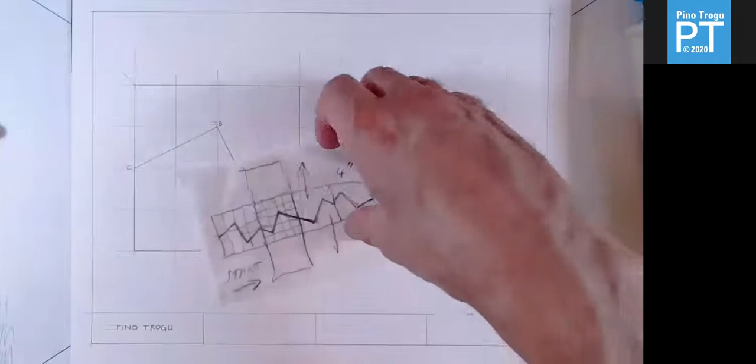Very quickly, here's what we did so far. In part 1, we did this sketch of various possibilities of sectioning the face of a cube. Then we picked one, and once we picked that, we did a couple of operations. We did a mirror image of the design onto the right, and then we took that whole pair and flipped it. You can see you get the same thing, except flipped. That's our pattern.

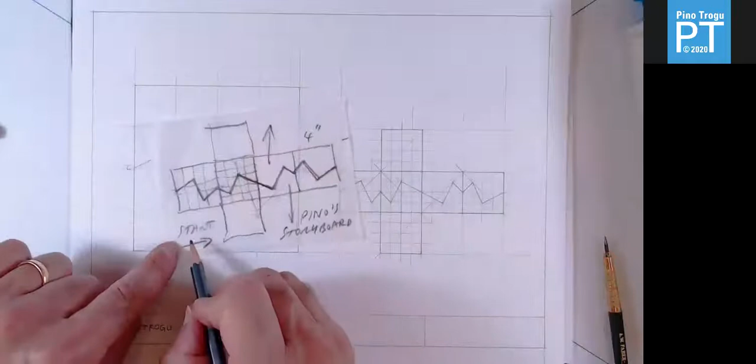So in part 2, and this is very important that you keep this, okay? At some point you might want to mark it and say, this is Pino's storyboard or something, because it's important that you remember which was the original section, even though technically they're all the same, but they're in different orientations. That's very important.

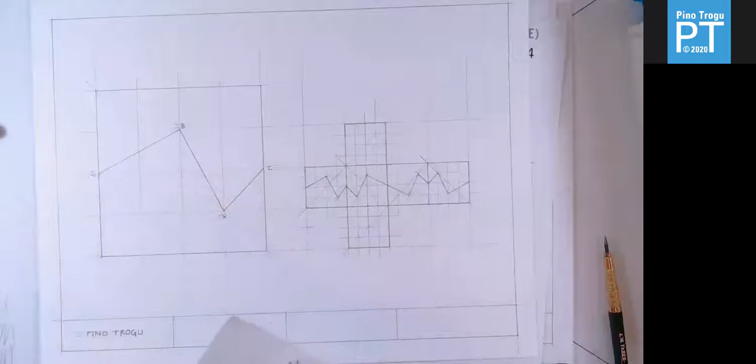So we simply did a drawing for part 2, which is just a straight-on shot of the cube in its full size, 1:1, 4 inches by 4 inches. Drawing light lines first using tools, then darker lines for the actual objects. Just mark the letters that belong to your section, and that's essentially the copy of your sketch on the right, okay? Everything is 1 inch apart going across, I think it's 1.5 inch from the title block, and whatever is left on the top, okay? This was the easy part because I could just repeat this 4 times.

I'll repeat this to make the cube, and then 2 more squares, and I can build the outside of the cube, right? I'm going to cut that. But the tricky part is how to do the inside. So we're going to figure out how to do those triangles, the exact dimensions, okay?

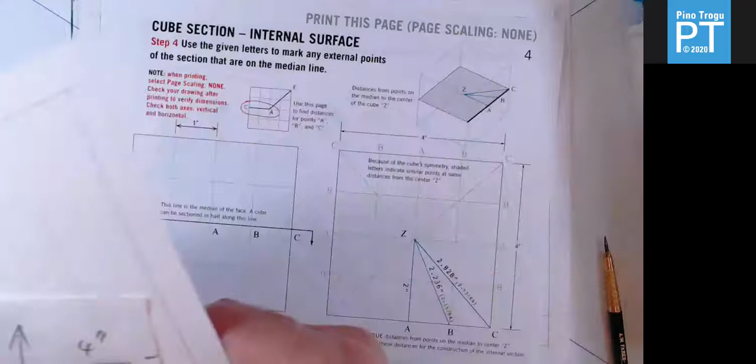Since you're all at home, and since I'm not sure if you have a printer or not, there's several ways that you can do this part. Oh, by the way, this drawing final will look like this.

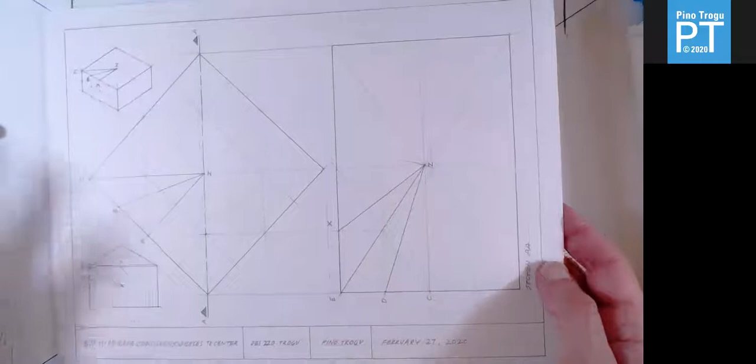So again, this is part 3. This drawing is actually right now extra credit, meaning you don't really need to draw it if you have the other bits of information that you can perhaps print. If you can't print at all anything, you have to make this.

Otherwise, you have no way of knowing how big the pieces are. But if you can print, you could print this, although you'll see in a moment why these are actually a little more complicated.

I think I mentioned it in the introduction - one of my students at some point named Slate, it's named after him, came up with this idea of doing all the possible lines kind of from the get-go. I'll explain in a moment.

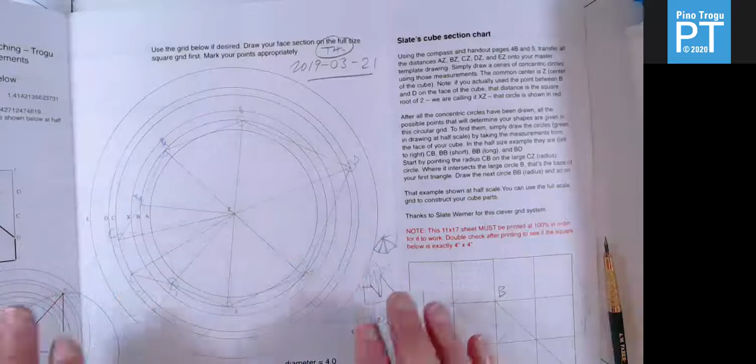And this will be blank, meaning the pattern won't be drawn. So I recommend, of course, if you have a printer, the main thing though is that you have to absolutely make sure that it is correct when you print it, because printers are funny. So you have to measure and say, let's take one that's even.

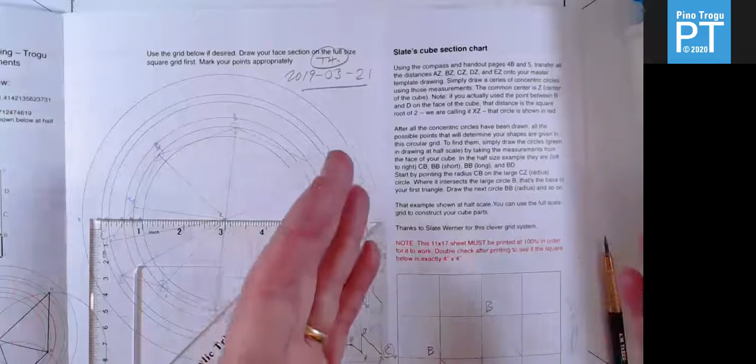So from D to Z is 3 inches. You have to check that from D to the center is 3 inches, because if it's not, you're in trouble, unless of course you print something off for every single drawing and then they're all the same, but that's weird. So don't do it.

So if you don't have a printer, well, I mentioned I could even mail this to some people if they wanted it, but that's a little complicated. So let's hope you have a printer. If you don't have a printer, you have to do this drawing, even though it's extra credit. Otherwise, you won't be able to do the rest.

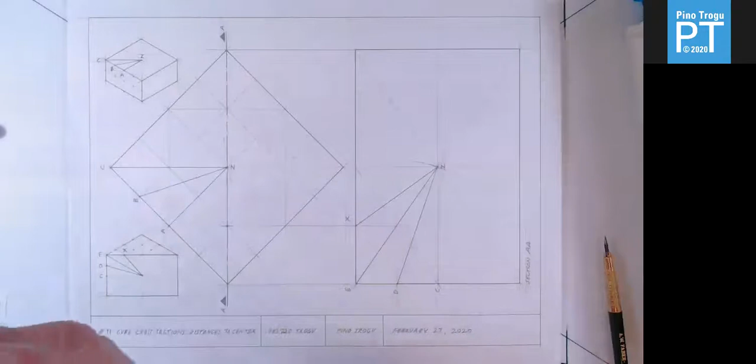So what is this drawing? This drawing is basically 2 sections of the cube that allows us to figure out how long these lines are, how long these pieces are from any of these points, any point on the face, because everybody has different designs. And if you recall, there are not that many: A, B, C, D, E, and X. So there's really 6 points which get kind of repeated. So once we find those 6 points, that will cover everybody's in the class, everybody's design, and definitely will cover yours.

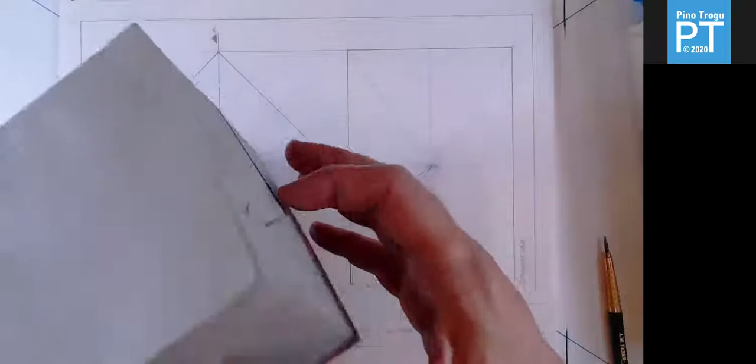You might need just 3 points. So what we did, let's just imagine we don't know what this thing looks like inside, right? So how would we find out how big it is? Well, let me just say one thing though.

I know what the parts on the outside are, right? That's one line, I know how big that is, I can just take it, right? Let's take this one. But I don't know these guys. However, if you have 3 pieces of information on the 3 sides, that's the only possible triangle that you can make. So that's our goal, to figure out, to find all the lines so that we can have a complete kit of parts.

Because if you have to find 3 different lengths... yeah, just slightly different. No, they're not. They're almost the same. Oh, actually, there you go. Yeah, these are all different.

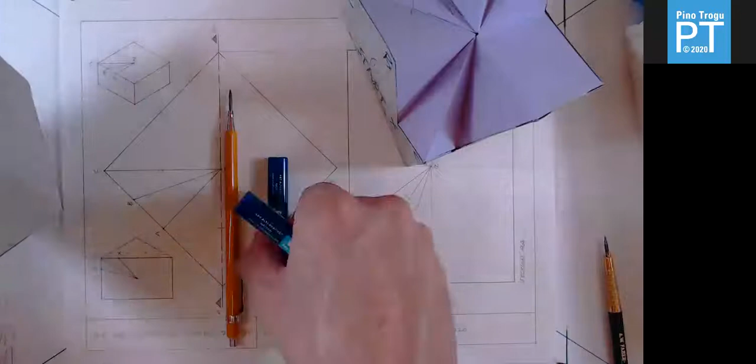So in other words, let's assume one line is outside. Let's assume it's this one. Okay, so let's assume that that's B, my point B right here. And I have to figure out, of course, what it is. But let's assume that this is X. It's a little bit longer. Actually, that's the longest right here. Well, I'm not sure. Whatever, whichever it is, let's say that's B. Let's say this is X, and let's say this is C. Oh, actually, I take it back. Never mind, I'm just trying to do one thing at a time here.

So BX and then to the center. So let's say that's B, and let's say this is X and then the center. In other words, I think that's what I'm trying to say. So in other words, if I know that this is from here to here, it's BX, and then this is B to Z, and X to Z, there's only one possible triangle. I mean, it could be flipped this way, but no matter how I move these around, it's always going to be the same triangle, right?

There's no options. So that's our goal, to get all these possible lines down, and this is what that drawing does.

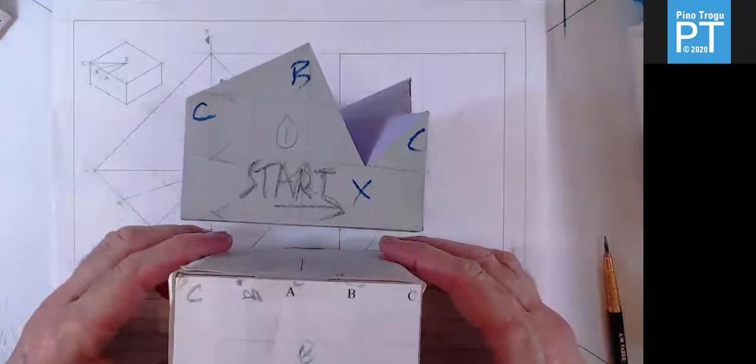If you look at your cube, or let's say that's my cube, okay? So as it happens in that design, I only have... I want to find out all the points that go across my middle. Let's see.

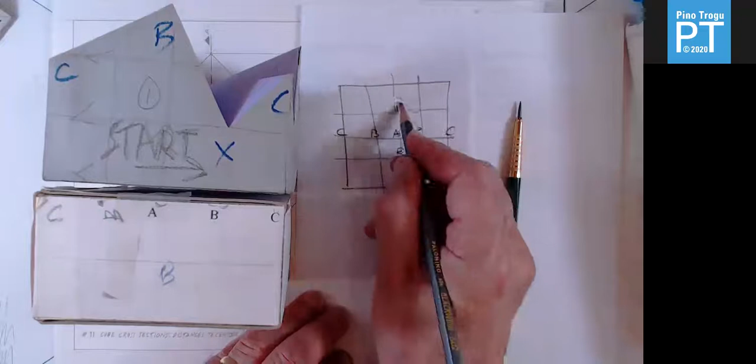If you recall, at some point we did a little sketch where we put all the letters. Okay, and we said that's A, and then going out, it was B, C. And then this, we called it X because it was an oddball that we added later. And then we went D and E, okay? And then here it's the same. And C, D, D, E, okay. So lots of letters, but it's really just 6.

So these guys, all the letters there, so basically A, B, and C, what I can find, I find them, I cut the cube this way, okay? And then I look, and of course, when you cut a cube this way, it looks just like the face. But let's, for a moment, forget about that so we don't get confused. And once I do that, my points that were on the face of the cube, and I connect them, that's these 3 lines, okay? So in my drawing, it's these 3. So this is this view of a cube that's been cut in half this way, okay?

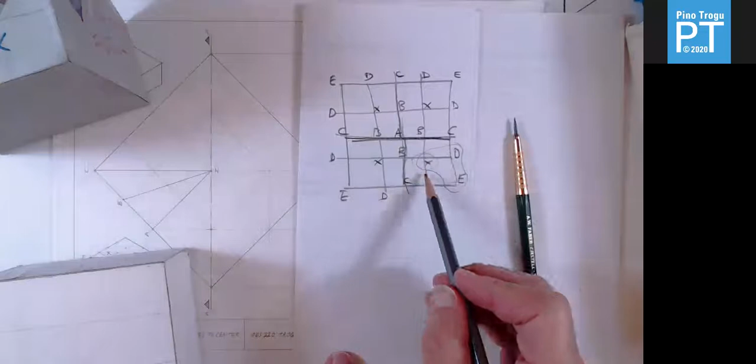Now what are we missing? We're missing D and E and X, right? And earlier I had another method to find X, but now we'll see that actually we can find all those 3 if we cut our cube this way. Sorry, this doesn't look like a cube. There we go.

If I cut my cube this way, all the points that are on the edge here, I can find them by cutting the cube along the diagonal, which is this one, okay?

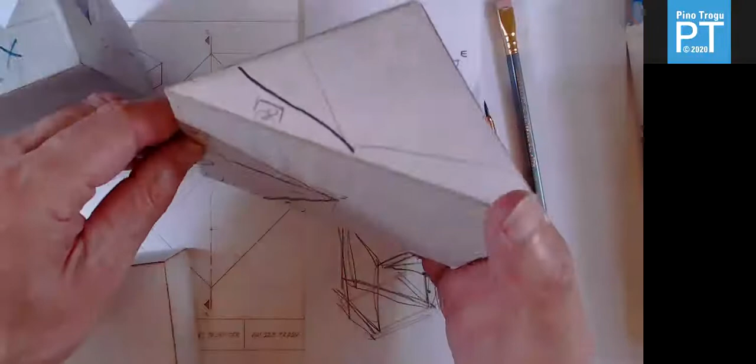So in other words, I still need to figure out what D and E and X are. But now notice that X is also, if I cut the cube this way, it's this spot right here. So in short, if I slice my cube diagonally and look, I have several ways to look at it, but X is going to be there, E is going to be there, and D is going to be there. In other words, those are the lengths I need. And that's what this is. Okay, so let's say that's like this.

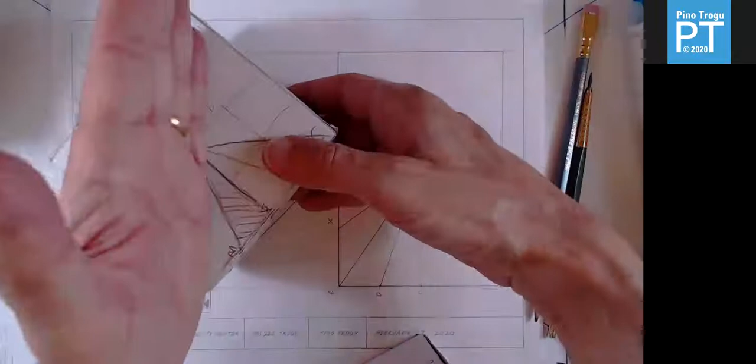So I now forget that this was a section, imagine that this is a whole cube. So I cut the cube this way, actually like this. I cut the cube and then I look, and now this is just turned, but it's the same thing. And then you have to make sure that this is 4 inches, right? The width or the length is whatever that diagonal is, okay?

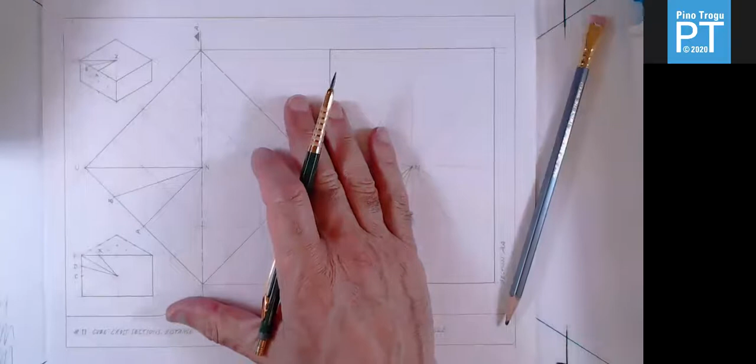And what I was saying earlier was that in the beginning of this project, I actually gave that information to students, but there was too much stuff here. So in theory, you have the same thing, and this is done on the computer, so it's perfect.

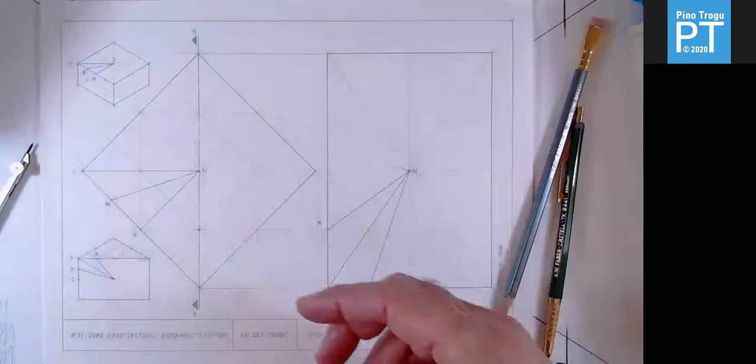But now what we'll do is we'll repeat this by drawing it, and then we'll do another step with the circles where we show that it's even easier, okay? And sometimes it's not good that it's so easy because then you learn less.

But all right, so I am going to draw this drawing. It's at an angle here, and then it's straight, so I'll just bring it back and forth. But before I start, I'll show you another way that you could think of that problem.

At some point, I showed my students that... yeah.

Okay, so if you recall, these are my points, A, B, and C. And I said, okay, well, if I cut that and then look inside, these are my dimensions. So that's one section for all those points in this position, any point like that. And then the next one was going to be the diagonal, so that would be any point that is here. If I cut it this way and then open it, I get them there.

And then later I realized that there was even an extra point, which was my Z, which for a while I did a special section to just find that, meaning it's there. And I said, oh, okay, if I cut this way, it's still going through the center, then I get it. And then later I realized, well, wait a minute, that's happening already here. So we don't need that anymore.

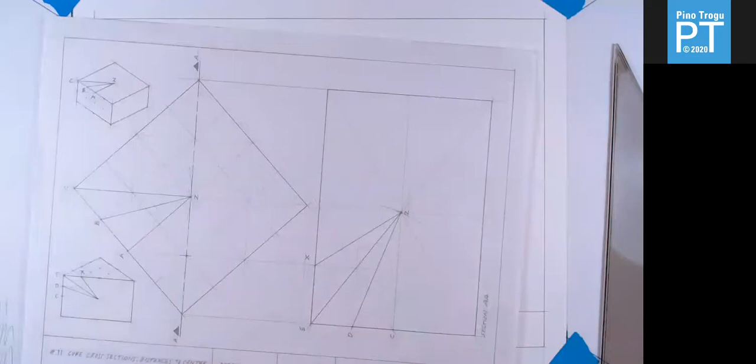So real quick, I'm gonna copy how far this is. It's definitely centered, okay? So whatever the center is, and then I left 1/2 inch there, which gives me barely any room. And I left 1/2 inch on the other side, okay? So it's at 45. What did we say? Yes, 1/2 inch. So I'm gonna measure 1/2 inch on the left, and actually I need the 45 triangle.

Let's draw a line. It's gonna be a little messy now, but I should be careful because actually, again, if I didn't have a printer, if you don't have a printer, this is the drawing that you're going to use to then build your cube, right?

Okay, let's say 3.5. So the center is here, I think. Sometimes what I do is I draw on the ruler and I measure again. Whenever you do something, you should draw a few lines that give you the sort of structure for the whole drawing eventually. So I know my square is going to be there, and I know that at 45 degrees I can build a square just like that. And I can just draw the corner there at an angle, the corner here.

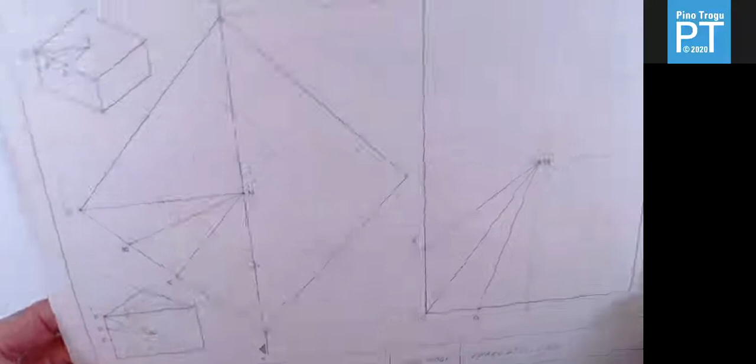Okay, so, we need to indicate that we cut this cube in half, and we do that by doing long lines and short lines, like that.

And then we show little arrows that indicate which way I'm looking. So I'm looking from the right after I cut it. And I'm not doing a good job here making the right in the same spot, but okay.

The interesting thing about computers is that all this process is just not there. When you cut something, it just cuts it, but there are no projection lines, there's nothing, so you don't see the real process of what it's doing.

And then we would name this. We would say A, and then here we would write eventually section A, section AA. Oops, did I do B? Maybe that's B. No, AA. Okay, I didn't mark this one. This is also another section, but yeah, okay.

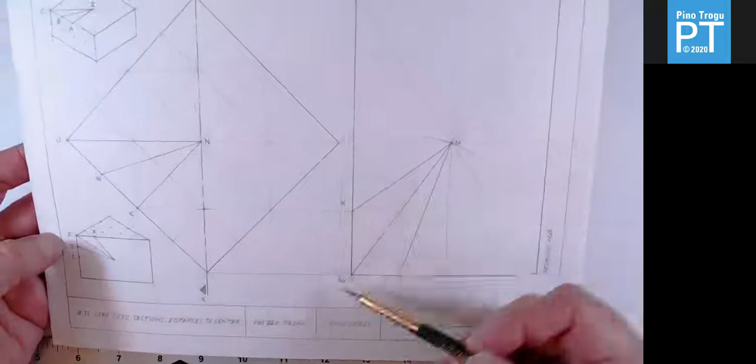So I'm just going to draw these lines, and then we're done pretty much. C, B, and A, and X, E, and D. Again, A, B, C, D, E, and X. Which correspond to these 3D views of them, right? This corresponds to this, this corresponds to that. Isometric views.

Might as well use the T-square, I have it. Since I have to do it not quite freehand, whenever you can, use tools. So here, it's good to use tools. Excuse me.

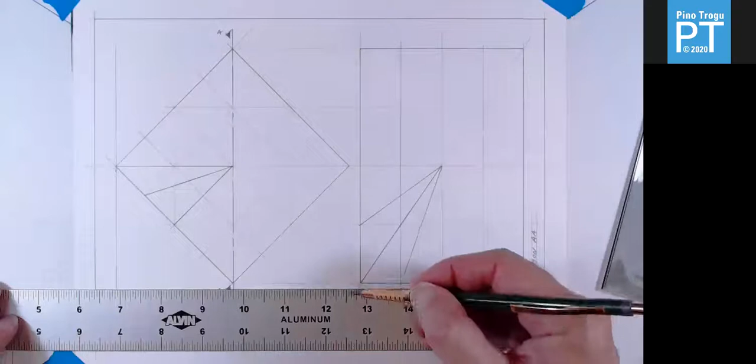Okay, so C, D, E. It's a funny thing, if you do two lines to fit the letters in, it always looks good, even if you do them afterwards. Let's see, D, E, and X. A, B, and C. And the center we're calling Z. I don't know why, just called it Z. Okay.

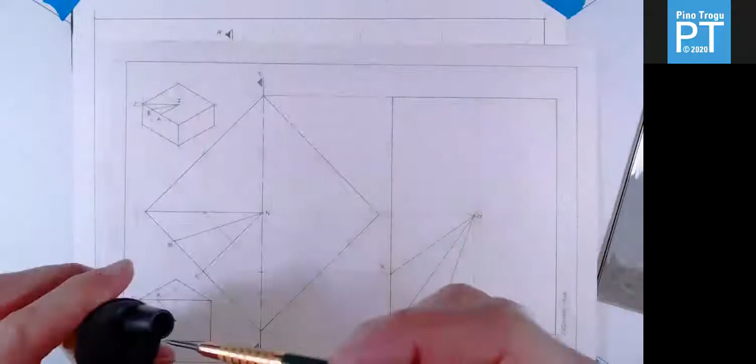Might as well draw those little guys because they look cool. And if you're going to do it, even if it's extra credit, if you're going to do it, might as well do the whole thing. Here, have a little cloth handy so you can clean your tools, and maybe a piece of scrap to even sharpen it a little bit better.

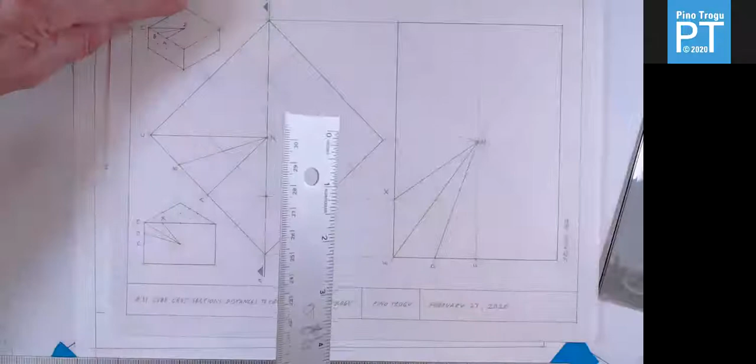I have to get a couple of dimensions here. Let's see, it's 1/2 inch and 3/8, 3/8, and 1/2 inch. So 1/2 inch, 1/2 inch, 1/2 inch, 1/2 inch, 3/8, 3/8 inch. Now this is not exactly necessary, it's just more showing what it is. Maybe even showing off a little bit, I don't know. But I want to do it because they really explain what the drawing is.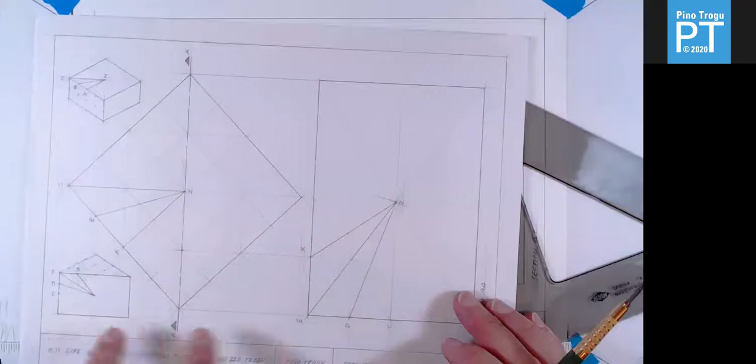How big is this? This, I bet you it's half of that, right? No, it's actually not. Yeah, because it wouldn't fit. So it's 1 inch. Oh, it is 1/4 inch. Okay, so it's 1 inch by, it looks 1 3/4.

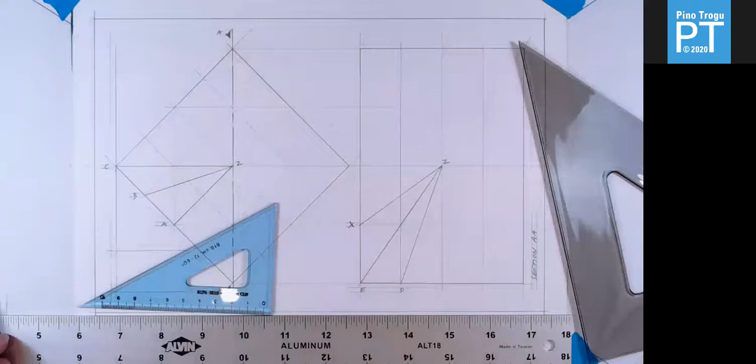And the way to do it really is to do this part first. Because... well, why? Actually, oh yeah, I don't know, I had to make a custom scale for this, so I can't quite remember. Oh no, it is 1 inch, right? Of course, that's 1 inch, and this is 1 inch because it's isometric, which means I can use a 30-60 triangle, this triangle, and build it like this. And then I can simply measure 1 inch.

Right there. And once I get that, now I can do everything else because everything sort of repeats.

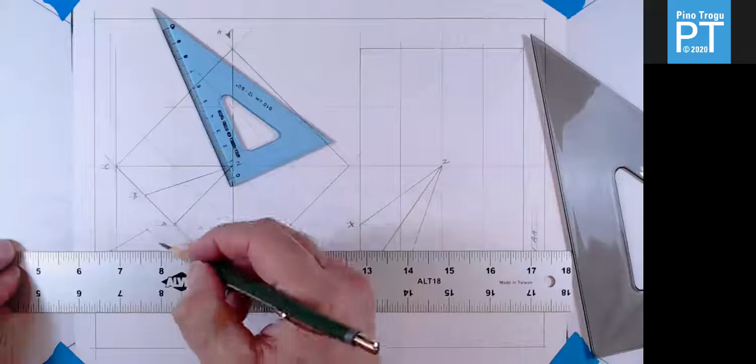So this is an isometric view of that section on the right, just to give us a sense. I did a grid on top and then these lines. The same thing we did here with the 45, we can do here with the 30 in terms of the grid. You can see how I can just use crossings to do everything I need, basically drawing a grid now on top of this cube.

For the center here, I'm just going to do a quick line like that. And I need to draw again D, E, and X, and just mark C just to show that it's there.

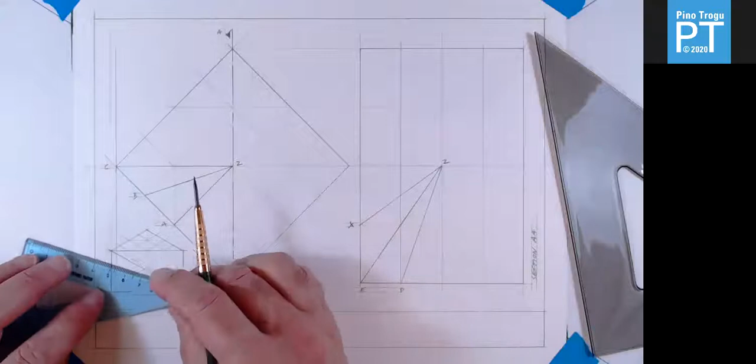Again, I can use—oh yeah, this happens to also match, so I get this other spot. And now I'm just going to do those lines. That's D, this is—no, that's E, this is D, and this is X right there.

So Z—yeah, that was sloppy. Except we're running out of room, so E, D—just bear with me, because as soon as I finish this, then I'll show how to use this to build a cube.

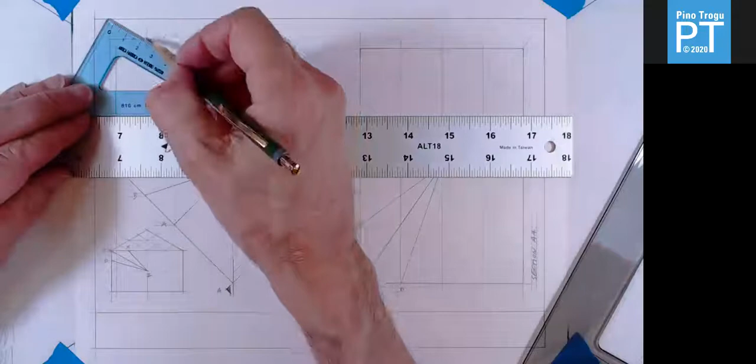So this one is a little—I can just project from the bottom now to build the one on top. See, that's what I meant earlier in the other videos about not measuring.

Definitely do not draw this fast when you do it, okay? Just trying to get past this part, which is really just illustration. And this was going to be a 1/2 inch.

Like, I'm correct, yeah. Does it fit? Yeah. Okay, so you can see you can do a lot without ever having to measure.

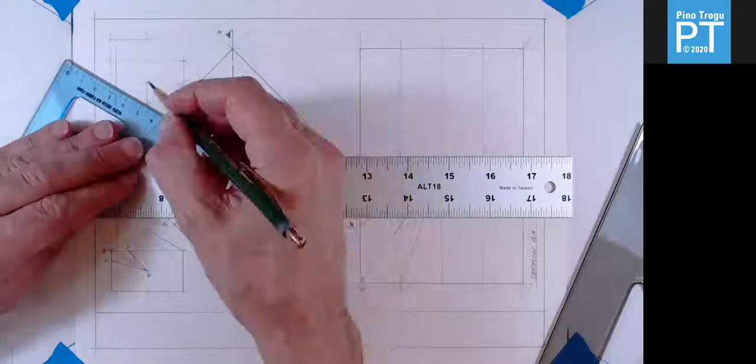It's nice too that the little triangle here does help. Very nimble—is that a word? Nimble. Nimble probably is a word.

Okay, so that's my other section. And I'm just going to quickly show that it goes there. See how I'm finding all the spots? And these are the 3.

That was B. This is C. This is A.

Okay, that's the drawing. You know, add your information there. And once again, what we just drew was this cube cut and then looked at from the side, and then another cube cut and looked at it, cut this way and looked at from the top.

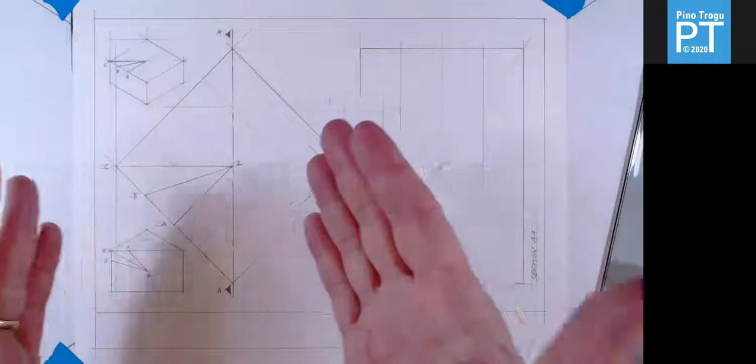Okay, I'm going to do now another little bit to see how you would build from this your design, okay? And then I'll stop, because there's another video that shows this in more detail. Actually, I'm going to leave it.

So normally what we would do is take—see if I can find the previous drawing. Yeah, now we have all the information on the outside here, these 3 lines, and we have any of the lines that we need, which we need C, B, X, and C again.

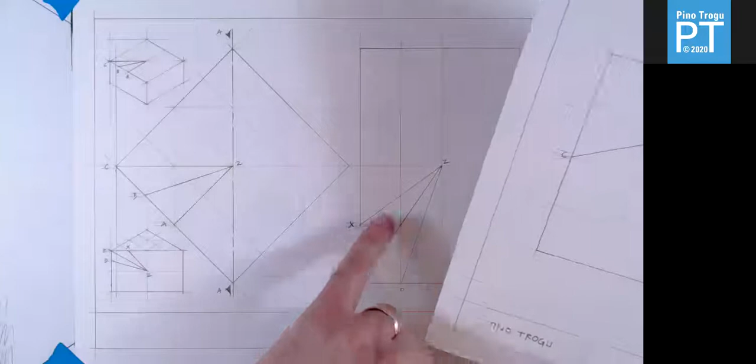So we will be using this line for C, we'll be using this line for B, going to the center, X, and then C repeats again, so it's that length again, okay? So let me show you how normally we would do this if you had the printout that basically was this, or if you didn't have a printer to do it.

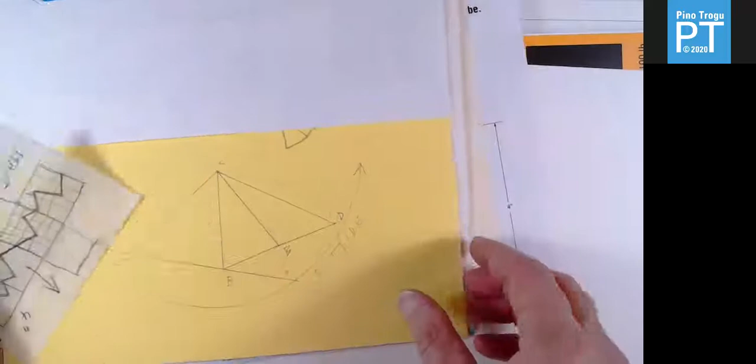I'm going to do yet another piece of paper. And this is actually now would be the next assignment, which would be the part that would become your master to build your cube completely. Okay, this is actually the next assignment.

And once again, if you had this template, you could build it here, but I'll show you now what's the process, right? So normally in these, if you can't print it, you would redraw your cube here, the section, and then you build the inside over this.

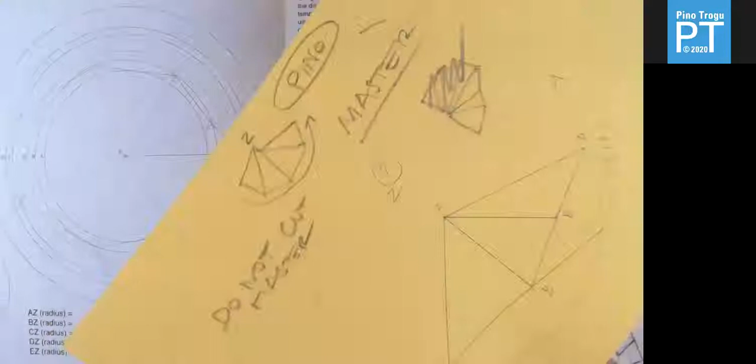And then once you did that, you would then transfer this shape with a push pin over to the other side. And this is shown in detail in the next video, okay—I mean, in the one that I've already recorded.

Then this is your master drawing, but it's a little flimsy to use because it will break. So what you want to do is transfer that design to a better piece of paper, which then becomes your master, and from that you build your cube, okay?

So how do we go? What I want to show now is how we go from this idea of how to build the triangles from this system, and how this is basically the same, except it's simplified because some of the circles are already drawn, okay? So just bear with me and I will.

Here it is. All right, so I'm now going to pretend again that I don't have a printer, so I have to do it from scratch. So what would I do?

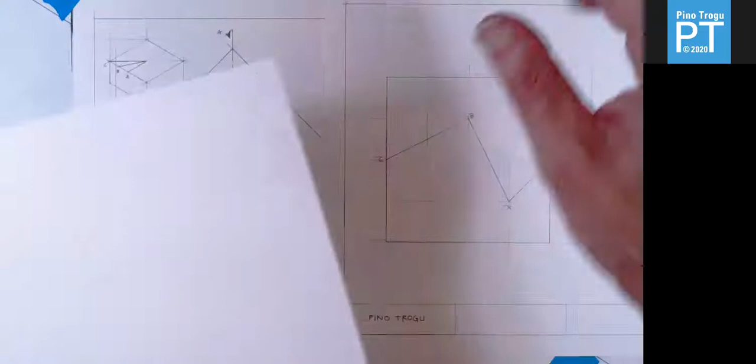We said again that if you have 3 lines, you can build a triangle out of those 3 lines. So for us, from C to B is the first line, and then C to Z and B to Z is the next line. And if we look at the cube, we're trying to find this line and that line. Never mind that this later gets connected, but this is the first triangle, then that's the second triangle. So by combining these lines on the outside with the lines on the inside, which we now have, we build a series of triangles.

So I'm gonna build 3 triangles. And again, I'm gonna do it, you know, before and after Slate - Slate being the student that said, oh, why don't we just draw this?

Okay, my compass is almost ready. I have to sharpen it a little bit. Remember how to sharpen it? You want to do it like a scalpel, like this. And again, I'm using soft lead - I'm using HB, but you want to use 2H if you can, just for the video.

So I'll be moving things around a little bit here, but I'll start with this. You can draw it anywhere. But I know the shape eventually is going to be kind of like a fan. Something like that. So I'm going to be maybe out here.

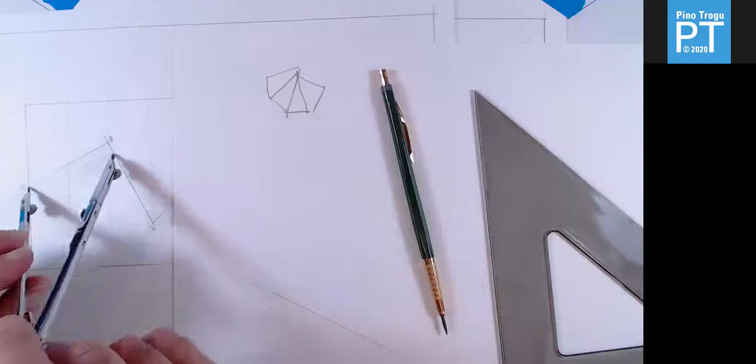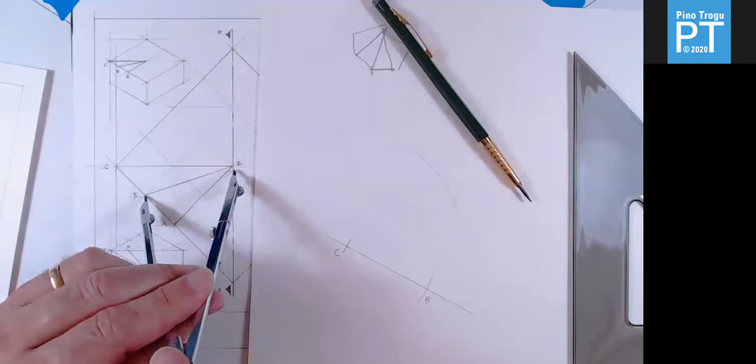Now I need to go to the center. So for that, I go to my section, and I look for C and B, and I grab those two. So that's C, and I go on C, and I do a circle. Now I do the same for B. I grab it from here, and just make sure it's correct. There.

Okay, that's Z, and that's my first point, which now I can connect. And I can darken it. You do have to be precise here because this is going to be the master to build your cube. So what I just did was I just solved this line from here to the center of the cube, which is my Z, by simply building a triangle. Again, there's no other possible triangle with those 3 lines.

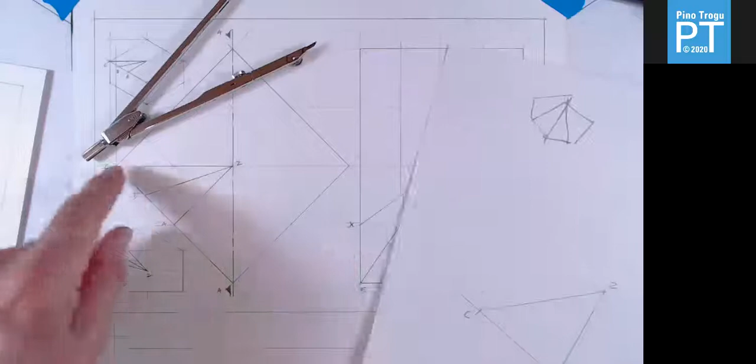Now I just keep going. So now I just keep going like this, on the outside here and finding those lines. So let's quickly do that. The next line is X. So X is here and it goes C, B, and then B to X. So I'm gonna go from B, right? I just now need to continue. Basically, I just did this line right here, this line.

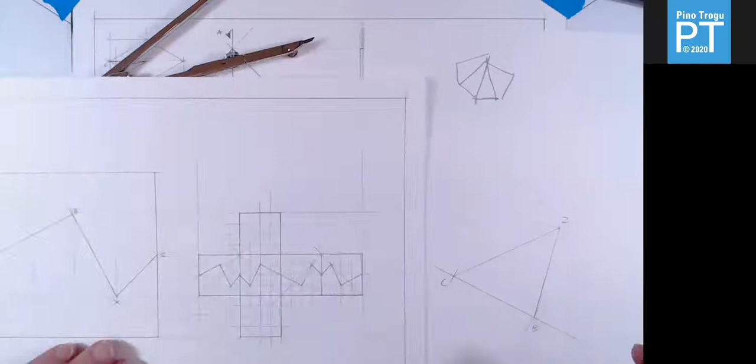Okay, now I need to do the next one, but it's all gonna be flat, so it's all gonna be on this piece of paper. So the next one is X, and I'm just gonna measure it, first on the outside here, which happens to be the same as from C to B, because if you look at it, it's just turned. It's the same line, it's just turned - in fact, it's turned 90 degrees. Anyway, I bring it over here. That's my X somewhere. Somewhere here it's X. And then I go to the section and I grab X from the section.

And now I point in Z because I've already done that part, and that's my next step. So that's X, and I can finish that one. You'll see this will be easier when we do the other system, but I want you to understand that this is what is happening. And the last one is going to be from X to C, which is just a diagonal from one inch right here.

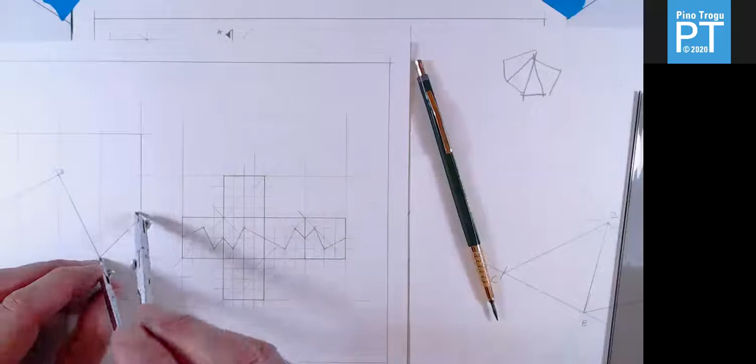Okay, grab that, bring it over. So that's C again. And C is C, which was already — yeah, we had already grabbed it from there, and we do it again. Now I point here, and now I have that last triangle.

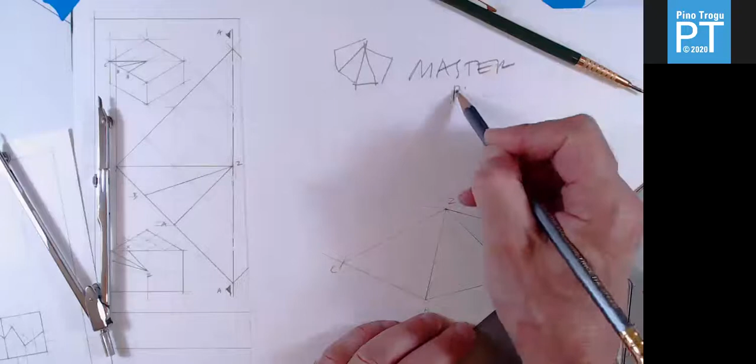Now, I won't be able to know for sure until I cut this out. Well, actually, I'm not going to cut this out. In fact, make a note: don't cut this drawing, because then you lose your master, right? This is what I call your cookie cutter. So just put your name, call it master.

And then make yourself a master. Now with the pin, we'll transfer this onto another one. So in theory, if I did everything right, these three triangles are like these three, one, two, and three. Again, this will be combined later, but this now just repeats. What changes might be the scoring and everything, but it's this. The cube is now solved as long as it's right.

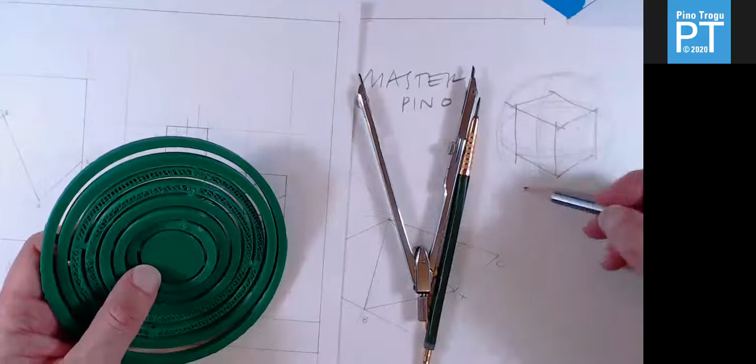So notice what's happening, okay? And here's where the circle comes into play. Basically, I went through these steps, back and forth. If you recall, I was talking about how if you put a cube into a sphere, okay, you have — actually that's more like that, yeah — you might have these points of the cube that actually touch on the sphere, on the outside, right? Perfect, and they all touch exactly right.

So each one of these is like a circle, going around the center. And if you can imagine that, this is a cube only on the outside — oops. But then these other points that are smaller might be a little bit closer, right? So in essence, we're drawing the drawings — oops, this is coming apart. All these lines that we're drawing here, these are basically all the radiuses going to the center of particular points, okay?

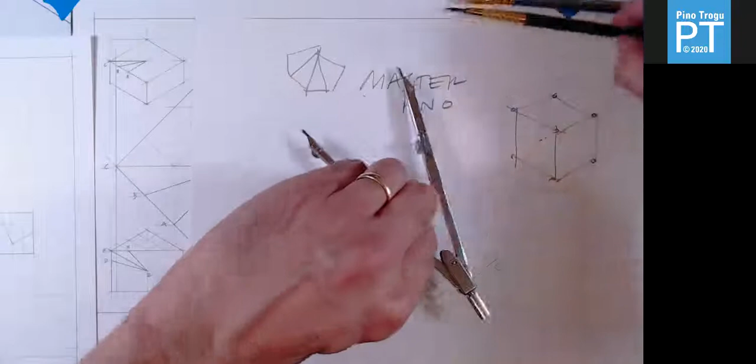And now I'll show you why this student was pretty clever. Instead of doing this, what he realized was that he was always going back to Z, right? So what he said was, well, why don't we just draw all the circles? Let's extend this — these distances, what if I just do this? Notice how this is the same point, right? And what about B? Now, in this particular design, it doesn't have D or E, so it's only the smaller circles.

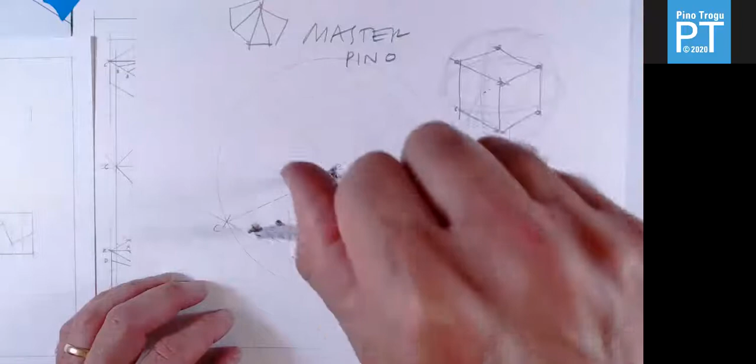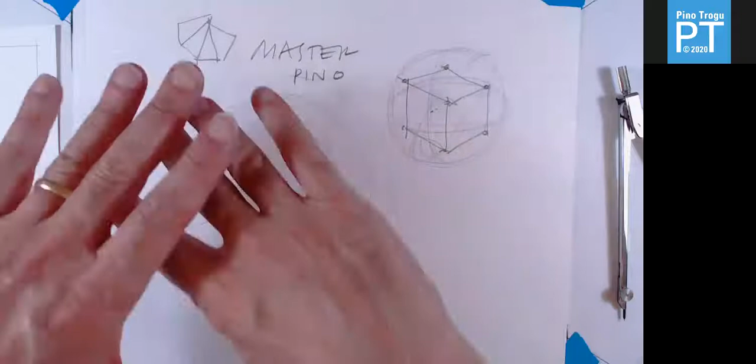So this would be B. And that's what he did. So he said, well, okay, and this is X. So essentially, he said, I'm going to draw myself a preset circular grid, because those lines are always going to repeat no matter what, okay?

And that's how you got this guy right here. So when this is blank, you'll be able to draw all your triangles starting — for example, this starts in C. So instead of doing this sort of piecemeal stuff, it will already be there. Okay, you'll still have to do back and forth from your design, but at least you'll have these lines already drawn.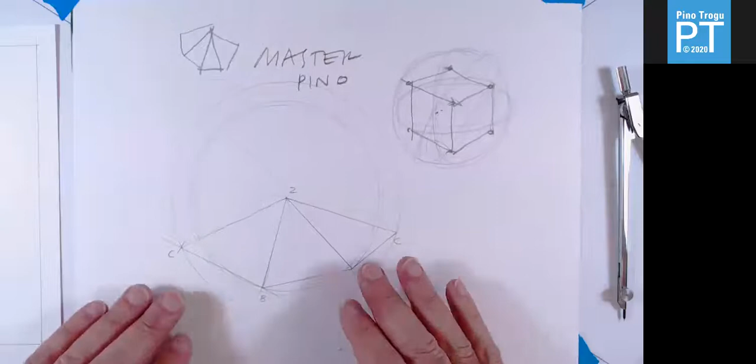And I can show you now how this would help, because just like this goes to C, B, X, C, because this is mirror, it's the opposite, right? Do you remember? So this is now X, B, and C. So it's a palindrome, like the...

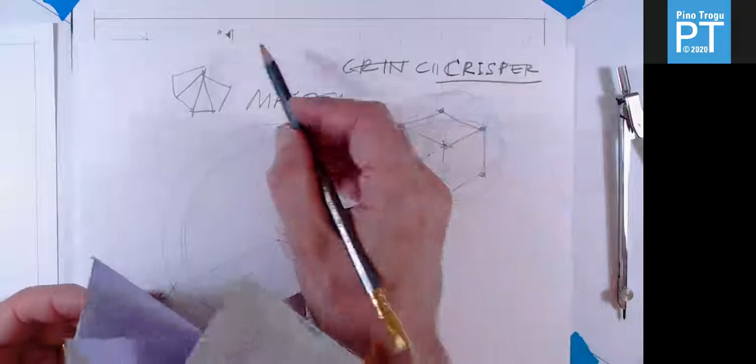CRISPR. You guys heard about CRISPR? The woman from Berkeley, Doudna, who won the Nobel Prize for gene editing. And that stands for clustered, repeating... what's I? Intermittent, I think. It's not spelled like this. Palindromic sequence, something like that. No, I didn't get it right. CRISPR — clustered, repeating, intermittent sequence, palindromic. I don't know, I can't remember. Anyway, a palindrome is when you read something back and forth. I should have rehearsed that better.

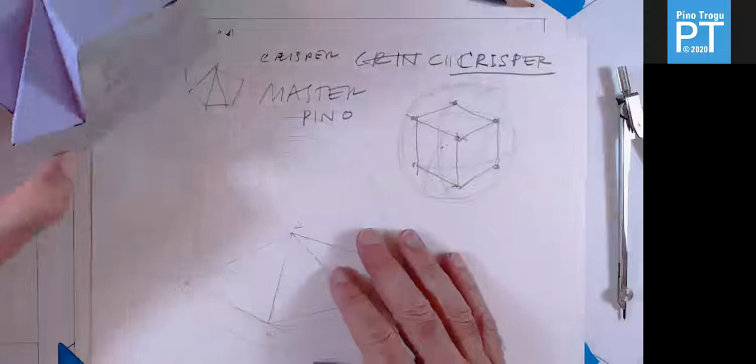Okay, so this is the same — this part is the same as this part, right? So what I can do now, you'll see why the grid helps, because now I just have to repeat. I don't even have to go back to my other drawings, because I know that it repeats over here, right?

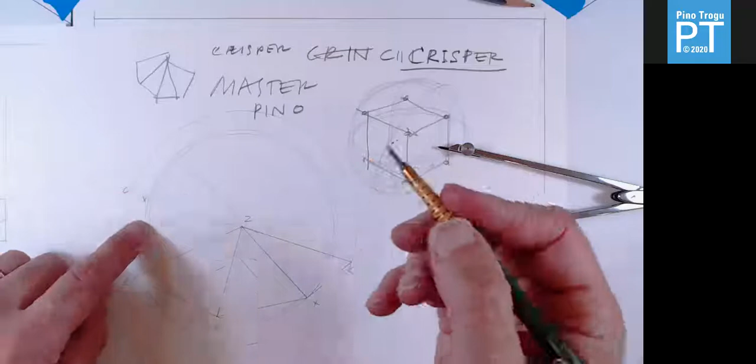I got there and now I have to go back, or inverse the process. Since I already have it here, all I do is bring these points over to these circles, which I call my X circle, my C circle, and this is my B circle.

And I just grab it and bring it over until it hits. By the way, you can be messy around these spots, but try not to touch that spot. So that's another X. Then I use the compass to really trace my steps. So that's B, and now I go from here.

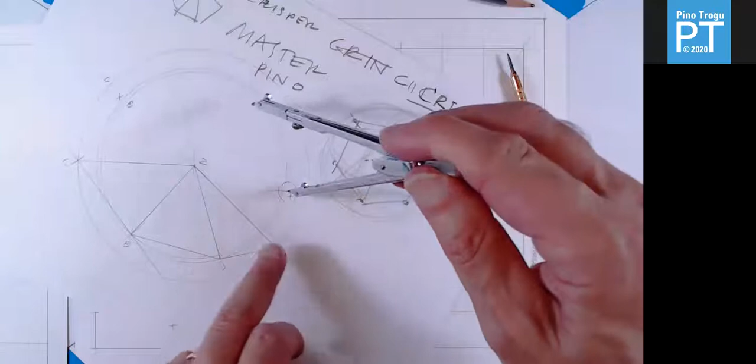So this is actually on the B circle, right there. The last one, C, meaning the distance is the same, but it hits on the C circle. And this was B. So there you go, that's now going to be my pattern.

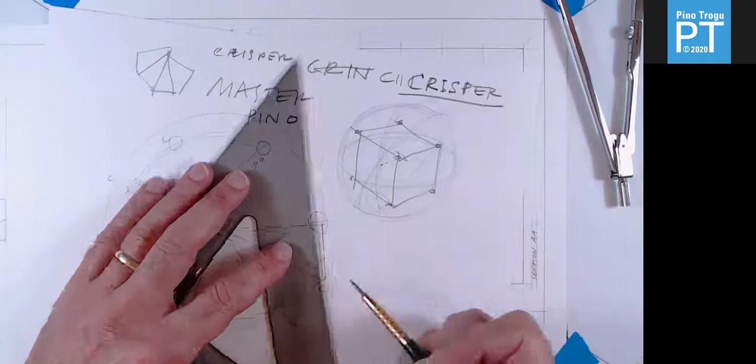And once I draw this pattern, it's really then fabrication. I mean, wait, where did I go? That's not right, I don't know what I connected there. It was actually here.

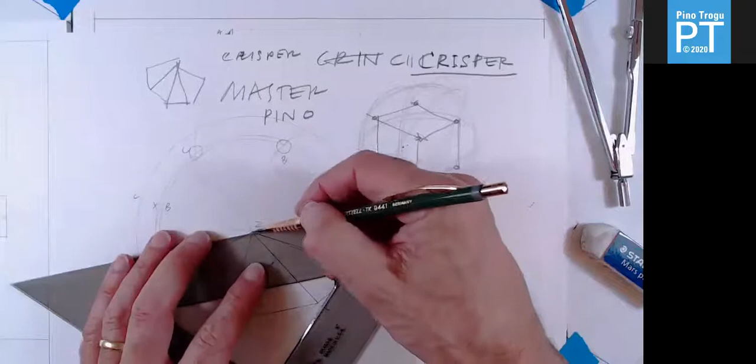So this now becomes my master, my cookie cutter to make all the other pieces. This is already explained and shown well in some other videos. And in a way, I'm already showing you the next assignment, which is the inside of the cube, which would have been part 4, but I think it's already there.

So that's my pattern, that's my... it doesn't look right, I messed up something there. Right, because I didn't pick up. Yeah, you see what I did? That's the spot I need, because it was connecting to C on the C circle. I marked it C, but it's on the X circle. So that's not good.

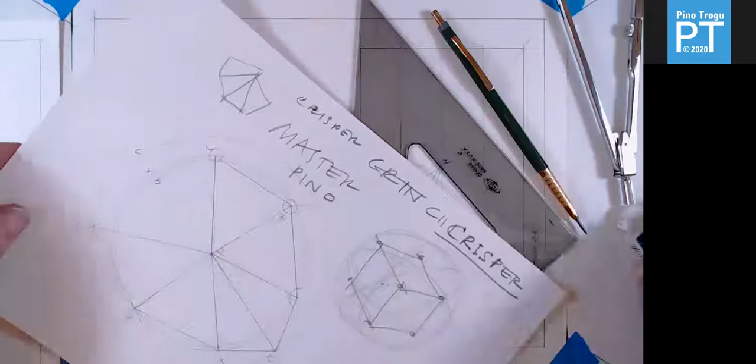It's good I caught it. But you know why I caught it? Because when I turned it and looked at it symmetrically, I saw that this was lower. Okay, so it was here. That was not good, it didn't look right, looked off, this part. So instead, it's right there.

Okay, almost done. And I'll just mention one more thing. Again, do this slower because it's very important. So this is my pattern. Now that looks right, because when I look at it symmetrically, it looks good.

Now you'll see that in this particular design, this is half, and this is what I just did, and this is the other half except with the inverted mountains and valleys. But you'll see that if we leave it like that, this will actually be a joint in a really nice flat area, which is kind of not very pretty. So eventually what we'll do is this, we'll steal...

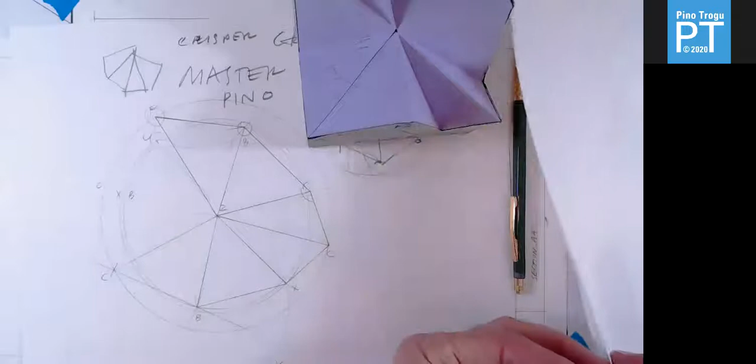Let me just show you. We'll steal one of those triangles from one side. So we'll take this triangle and move it over to this side. And I'm just going to quickly draw it like that, very lightly. But how do I do that? I need yet another piece.

Not so easy. So basically this triangle, I'm going to steal it from that side and bring it over. Okay, and then I'm going to delete that line. So this is what I call optimizing the fabrication later. Okay, so we would delete that.

And this would be my pattern now, that would allow me to build this still in 2 parts, but with the joints being in a valley or a mountain instead of being in the middle of the plain, right? With the rain in Spain. Okay, that's it.

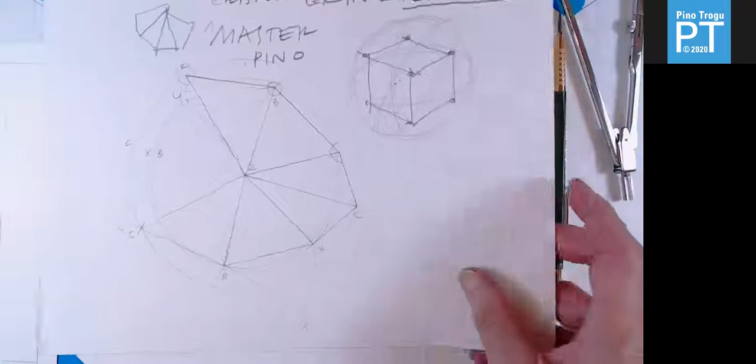So essentially the next part will be for you, if you can print this pattern, which again is in 2 separate sheets, to then use that, redraw your cube there, and then you would do this by using a push pin and pushing. Okay, all right. So that was the inside of the cube.

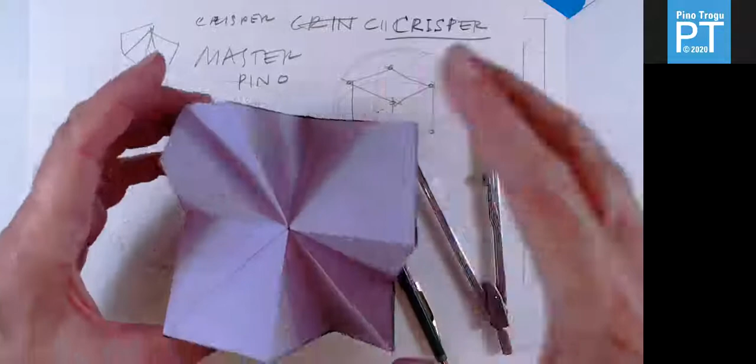This guy right here. So I'll see you—well, actually part 4 may already be done. So watch for that inside of the cube video using once again the video that's up there now. It's using this pattern, but if you don't have this, you'd have to definitely draw what we just drew, the extra credit drawing. All right, see you next time.